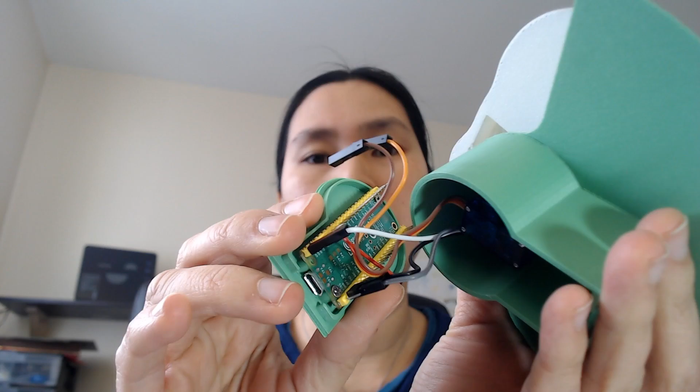When you buy your PCB, like for example Raspberry Pi or Arduino, like I have Raspberry Pi Pico right here, that size is fixed, so you have to make your mechanical part fit to its size, like the holes and everything here.

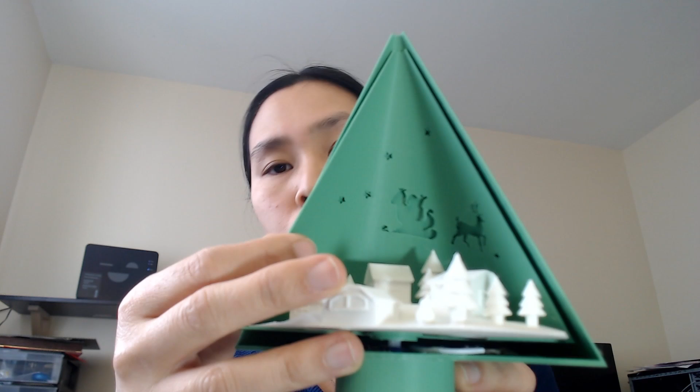But in some cases, when you already have your system and then you want to add some PCB into it, there's some other requirement, like you cannot use the normal square shape of the PCB design. For example, what I have here, this is my Christmas tree that I did last Christmas. The link is up there for you to check. I have those winter houses with the tree and everything where it have the hole on the bottom for the light to light up, and I light them up using the LED that you can see here.

At first I designed them to be stuck into these 3D printed pieces, so I stick on the LED, and then I need to solder around. Then I need to use hot glue to stick to position to fix them in the spot right here. Then I realized this process takes a lot of time and it's very hard to put them in the right position, so I wanted to make a PCB for it.

And since it's already here, you see there's a motor hole right here and then a hole for screw to fix them in position. It's impossible to do with the normal square shape PCB, so I need to make a custom design for this one.

We can start with FreeCAD, where I have the CAD model of this Christmas tree. Then we need to design more or less the shape, the CAD file for the PCB that we want. Then we need to export that into Inkscape with the SVG editor, where you can add all of the requirements about the layer, the board, the silkscreen, to be imported into Fritzing. Fritzing is not so professional in making PCB, but I like it because it's very intuitive, very easy for you to follow.

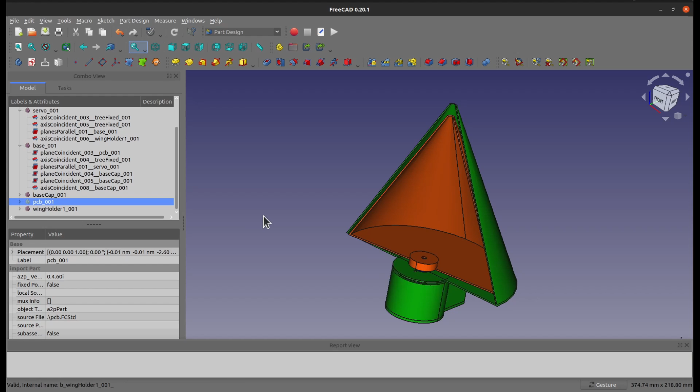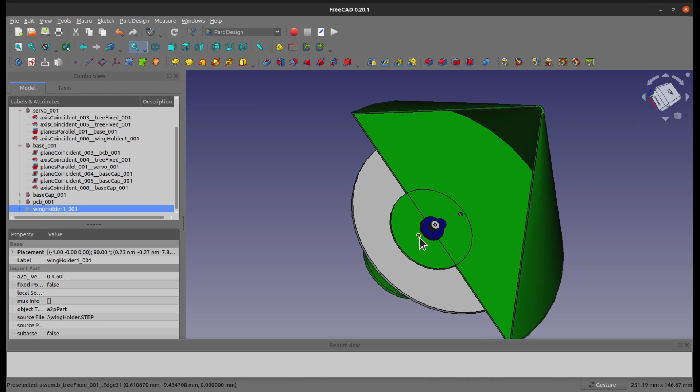What I want to do is just add the PCB like you can see here. I add it on the bottom just for the easier screw and fixtures. As you see here, let me hide all of this part so it's easier for you to see. It needs to fit in here where we have the servo motor, with the irregular shape of circle here, and then we need two holes for the screw to fix it into the base. That's why I designed the PCB like this.

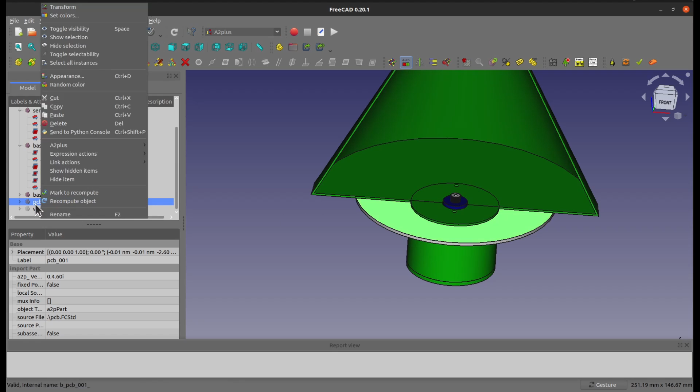So I'm not going to talk more about the assembly workspace of FreeCAD. You can find tutorial online and you can check on my tutorial there also. I also won't talk much about how you design it because your design is different from mine. I will tell you how to export the drawing into Inkscape so that you can add all the requirements for Fritzing. So here I have this piece design already here.

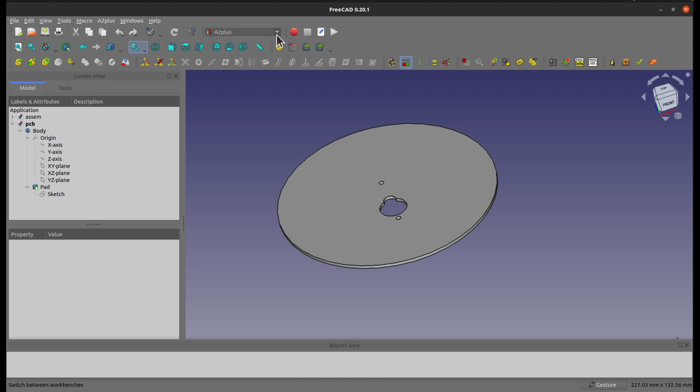To extract the view here, the shape here into Inkscape, we need to use a tool to export the SVG drawing out of this. So to do that, you can go to the TechDraw workspace here. So in the TechDraw workspace, you can extract the drawing out. So let's go to the top where you want these shapes to be, okay, in Inkscape.

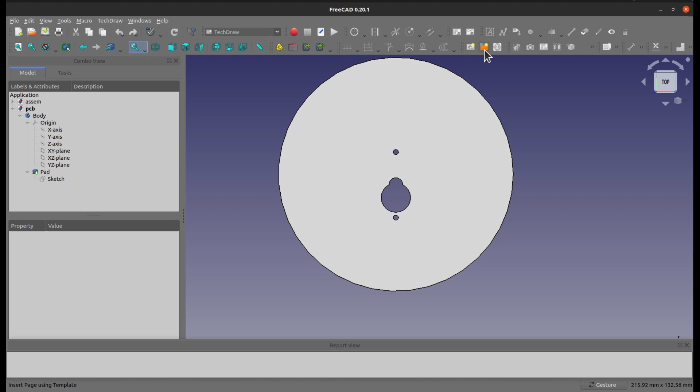So from here in TechDraw, you can add a new page. There are two ways to add new pages. Insert default page, which gives you the page with the frame already, and you don't want that because you just want this shape. So we go to insert page using template, and here I know that my size more or less fits within the A4 or letter. So I only choose the letter landscape but blank, because the other one includes a name frame and you don't want it.

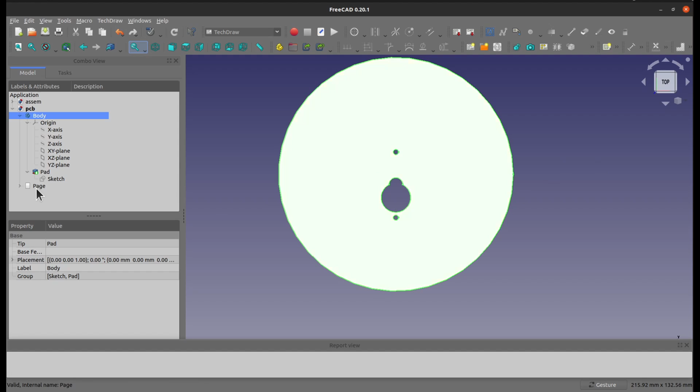So here, open the page. Now come back to our model. Make sure that it's in the normal view that you look at it, like this, so that you can export the exact precise shape into this page. Click on this, control click on the page, and then go to Insert View, so you have the front view of it like this one.

That is done. Now all you need to do is go to Export Page as SVG. I'm gonna click on this Export Page as SVG. So in here I'm gonna put the name PCB from FreeCAD. Okay, so we save it here.

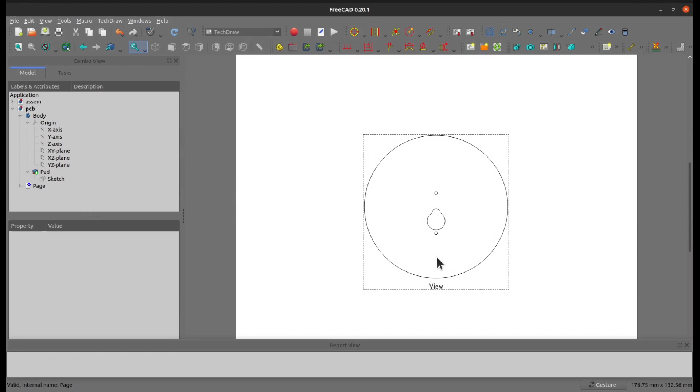Done. Now we're gonna go to Inkscape and open that file. We can open the file that we just designed. So we go to PCB FreeCAD. The thing is, this is a new version of Inkscape, but it's gonna be similar to the other one.

First of all, you need to go to the document property, so that we can fit the size into the board only. So we resize to fit content, and then, guys, I don't want to show guides, so it's enough. Okay, done.

So this is the part we have here. Then we need to delete and group them in a way that Fritzing can understand. So to do that, you need the XML editor of Inkscape. When you click on this TechDraw here, you have two groups.

The first one is landscape blank, which is the template. Then you have the drawing content, which is everything we make in here, the circle in here. What we have to do, we need to ungroup all of them and then group them in the way that Fritzing could understand. So here I go to ungroup, Control Shift G, right?

So you can just do all of them like this. And if you notice, whenever you ungroup, the part gonna show over here. So we can just do this over and over many times, so that we don't have any group anymore.

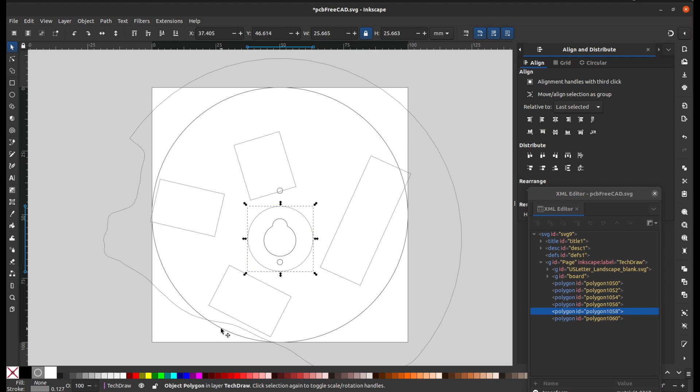So we just need to align it with this one only. Okay, so the big circle here and this small circle have to be aligned. So I'm gonna choose this one and then this one. You go to align, you go to horizontally. And when it's already quite good like this, you can adjust the up and down of this one to fit, but I think it seems okay for me now, right? So now you have to group back all of this.

I don't need this line, so I'm gonna delete it. I just need these 4 holes for my LED. So here, here, here, and here, and here we just group it. Then we have a group here, which we're gonna change the name of to silkscreen, like here. This is the requirement of Fritzing. If you don't have it, you cannot make the thing work. So silkscreen.

Okay, so now you have two layers, board and silkscreen. It should satisfy the requirement of Fritzing already. We can try right away if I remember correctly, right? Oh, I forgot, we need to change also the stroke, so that it's not going to be so big in here. Let's go to stroke. Oh, where to show this object? View and stroke here. Put this one down so we can see. Remember to fit the document to the drawing also. So here, done. Okay, good.

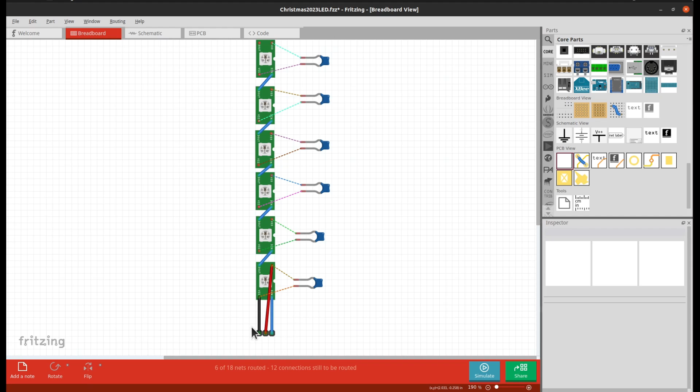We can go to the next step, which is putting it into Fritzing now. So here is my circuit in the Fritzing software. You can see I have 6 LEDs connected with 6 capacitors, and they are all connected to the 3 jumpers here that connect to the Raspberry Pi Pico. So here is the schematic, 6 of them, connected to the Raspberry Pi Pico. If you look at the PCB view, you see only the rectangle PCB is there, and we're gonna add our custom PCB right now. If you go down from here, go to load image file, and then we choose the PCB FreeCAD SVG, open it, and this message is very important.

So the custom shape has been loaded, and you will see the new board shortly. That's it, good. And then you see the custom shape has 3 cutouts. We have 3 holes, and it said it had 3 cutouts here, so it's correct. So we have to check this. Sometimes they say there's no cutout. It means that you didn't do the difference and the union correctly. So that is one point for you to check.

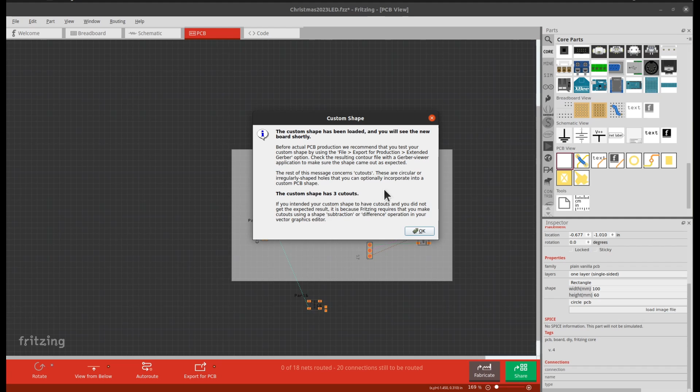And when you click on OK, you have the PCB in, and now you see with the PCB in here and the position of the LED marked by this silkscreen, you can move it to the position that you want, to the proper position here. Okay, so you can move the component to the proper place. For example, I can move it here or there because I want it under the house, right? So these are simple steps for you to create your own custom PCB and add it to Fritzing.

There's one important thing that I want to remind you. If you use SMD components like me, in our case, it should be on the top layer. But if you choose single side, they want to put them on the bottom. So what we can do here, you can just flip the silkscreen horizontally or actually vertically, so that we can have the correct position for the LED.

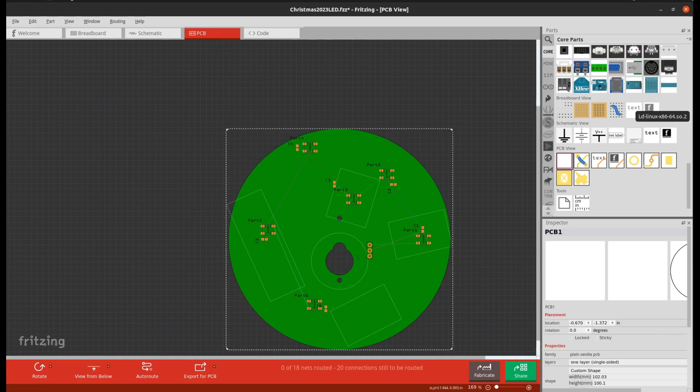To do that, you can go to the Inkscape file here, and we just need to flip only the silkscreen because that marks the position for us. So I go here, I flip it like this, then you will have the position correctly when you look at it from the bottom up. Okay, I reflip it. Now we can save the file and put it into Fritzing. So it's here, Fritzing. We go to here, we load the image that we already made.

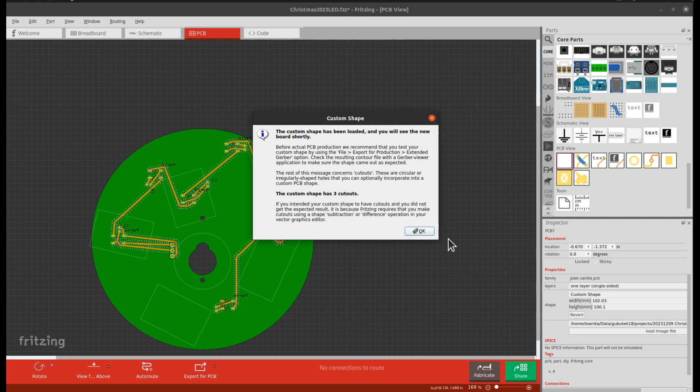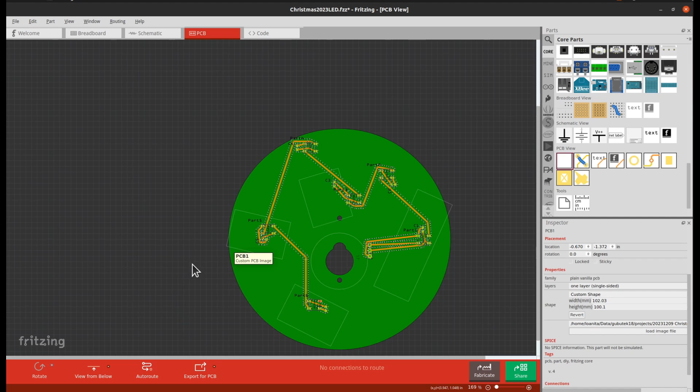Okay, so it works like this. From above, it will be like this, but when you look from below, now it's the correct position because our bottom face becomes the top face. So the positions are correct right now. Now the PCB is ready. Basically, you can export it to Gerber file and then send it to manufacturers. Actually, it's better for you to check it with some Gerber viewer, which I can do right now.

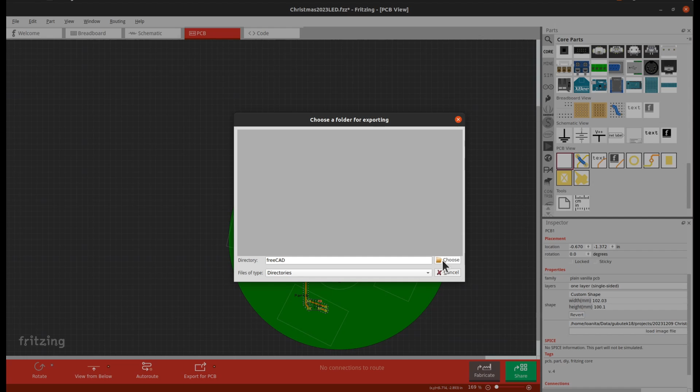I can just go to here, go to export for production, extended Gerber file. Okay, and I should choose this folder, FreeCAD here. I chose this folder, FreeCAD. We're gonna export into it. Now let's go check the file.

So to check it, you can go to the Gerber viewer online of PCBWay here, and you can add your Gerber file that you just created. So into here, go to FreeCAD where we added. You can add the drill file, the contour, the silk bottom, silk top, mask bottom, copper bottom. Okay. So all of that, and we open it. It will take a while for this online viewer to show the PCB, but don't worry, it will get to the point. Here is the result in the Gerber viewer of PCBWay.

This is the top layer, you don't see anything, but if you go to the bottom, you will see that it actually becomes my top layer because I do it the opposite way. I want it, it's an assembly component. But anyway, here's the bottom layer. Then if you go to layers here, you can see all of the layers. The most important one is the outline here. You need to check it because that's exactly how the PCB looks after it's made. We need 3 holes, and I have the 3 holes correctly with the circular shape here. So it's correct. Never mind my component position because I just want to demo for you quickly. You can check all of the silkscreen here is correct.

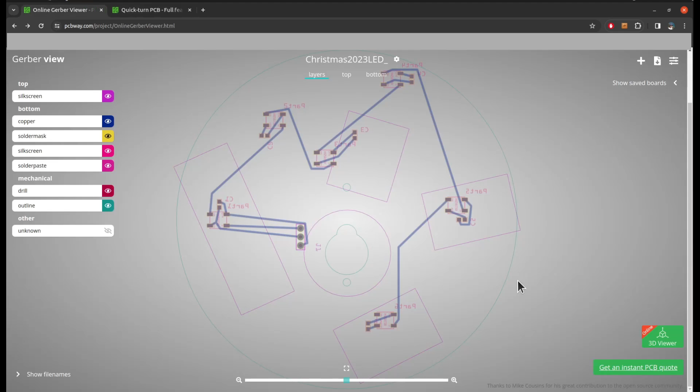Everything is correct. And then you can get an instant PCB quote, you can choose what kind of PCB you want to use with them. All the setup is here. Then when you save to cart, there are going to be people to check on it for you, and then they let you know, give you a green flag that it's good to go or not. So this is how you can check your file before sending it to the manufacturers.

I hope you enjoyed the video and it will help you with your design using all free software, Fritzing, FreeCAD and Inkscape. It's very practical when you need to make something that's not readily available. You need to design for yourself.